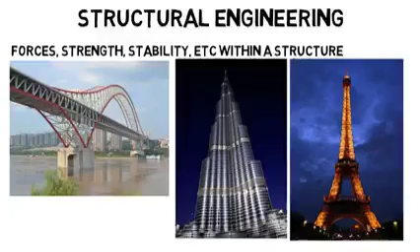So first, structural engineering is about calculating and understanding the forces, strength, stability, and so on within a structure. It could be a bridge, a skyscraper, a landmark, or even a spacecraft or aircraft. Remember, these structures are very heavy and need to support their own weight so that they don't collapse.

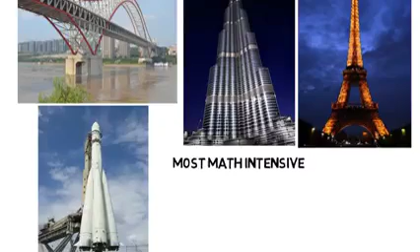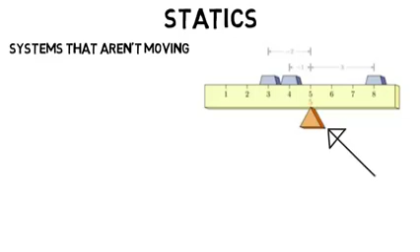Now this subfield is the most math intensive and has lots of physics. All civil engineers will take a class called statics, which is all about the forces and systems that are not moving. In basic physics, you may have done a statics problem, like where does this support have to be for the system to be totally balanced and therefore not moving. You summed all the forces which equaled 0 and all the torques which equaled 0. And that's the basics of statics.

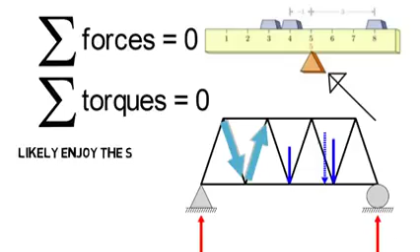So if you're looking at the forces within a bridge or truss, well, the same principles apply, but now there's just more to it. The weight is straight down as shown in blue, all the beams exert forces on one another, but the sum of them is equal to 0, and the torque sum to 0 as well because the bridge is not moving. And it's of course even more complicated than this, but if you enjoy that kind of basic physics you see above, then you'll likely enjoy the statics and physics you see in structural engineering.

So that's just a very simplified explanation, but now let's dive into some of the classes they would take. One class that would be important for structural students is a reinforced concrete class. In concrete structures, they reinforce it by putting steel beams in the concrete. We can't see those beams, but here, before construction is done, you can see them sticking out, or you can see a lot of them on these unfinished columns.

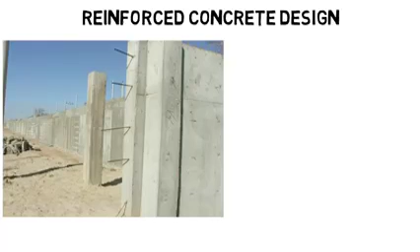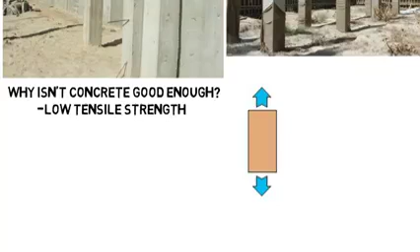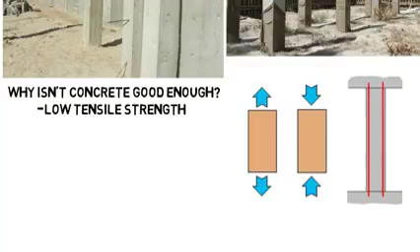So why do they do this? Why isn't concrete good enough? Well, concrete alone, once hardened, has low tensile strength, as in it does not handle being pulled very well. However, it's okay with being compressed. But to counteract that low tensile strength, they add steel beams and pour wet concrete, which hardens around them, and then those steel beams have high tensile strength to counteract those types of forces on the structure.

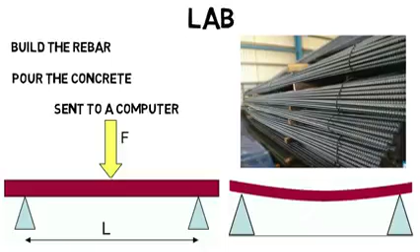So in a lab for this class, you might build the rebar, or the steel reinforcing rods, pour the wet concrete onto them, then once it dries, use a machine that holds the beam on both sides, then apply forces in the middle and keep increasing the force until the beam breaks or cracks and starts falling apart. That force being applied is sent to a computer that tells us the loading on the beam so we can collect the data and get the properties that we need.

You could take structural dynamics as an elective class. Dynamics is about moving systems, unlike statics. So this is one of the few classes where motion is included. So whether it's wind or an earthquake that shakes a building, you need to know how that motion will impact the structure itself and all the forces within it.

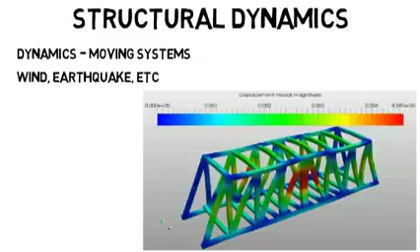I've shown this animation before, but mostly for mechanical engineers as it's a vibrating system that they could analyze, but civil engineers could get into this as well. They have to make sure their designs can stand up against any type of movement the structure may be subject to. You could take an elective class on seismic analysis, which is specifically about calculating the responses of a structure to an earthquake, or one on bridge engineering, which would be a class on highway bridges, materials used, distribution of loads, and how forces are spread throughout the structure, and so on.

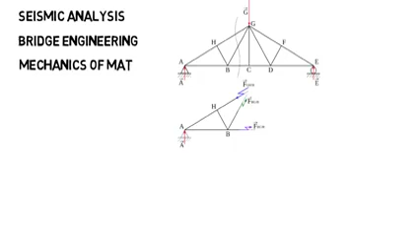Mechanics of materials, like how twisting and bending a beam or column causes it to become internally stressed. Timber structure design, which is about analyzing properties and forces within wooden structures, and much more. See how even if you choose structural engineering, you could still take many different classes from the other structure students? It's a very broad major, but hopefully you really get the idea by now.

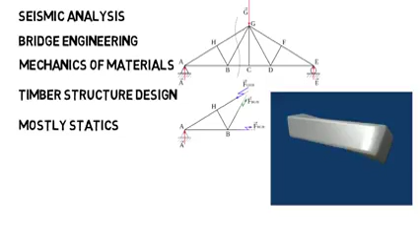Lots of physics in this discipline, but mostly statics or forces and structures without movement. In the real world, these engineers often work on the computer and use software for their designs, where that software does that advanced math to determine the forces throughout the structure, like you see here with an office block and its components.

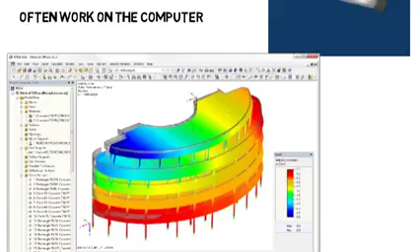You may still have to do hand calculations, but most of the rigorous analysis you learned in school will be left to the software. Now let's move on to geotechnical engineering, and you'll already see how different these disciplines are.

Geotechnical engineers are concerned with the behavior of earth materials like rock and soil, but the main focus is soil. This may seem odd, but you'll see how important this is.

The structural engineer can do everything right to make sure the building will stand up, but if the geotechnical engineer messes up and you put a structure on soil that can't withstand it or is uneven, the building could fall, sink into the ground, or even lean to one side, probably the most famous being the Leaning Tower of Pisa, which was a result of soil issues.

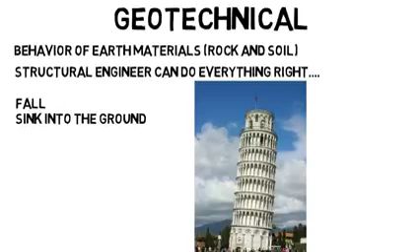Then they also have to consider the foundation of the structures being designed, like whether they should have a shallow foundation or a deep foundation. You may not realize it, but our houses and all the buildings you see have foundations that go underneath the earth to keep the structure as stable as possible by transferring the weight from the structure to the earth.

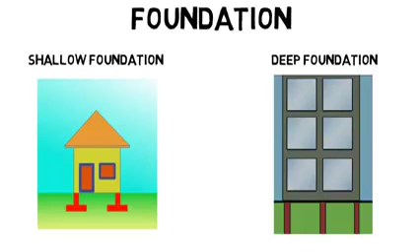But geotechnical engineers rely heavily on testing. So a lab you might see in college is to go out as a class and collect soil samples around your university and bring them to lab.

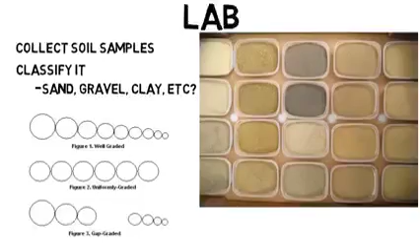You would have to classify it, like whether it's sand, gravel, clay, etc. There are many soil types, and you may have to look at the grain size or how it reacts to water. You determine its water content by analyzing the sample, which will be comprised of solid soil, water, and air of different masses and volumes.

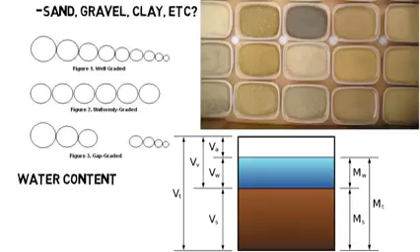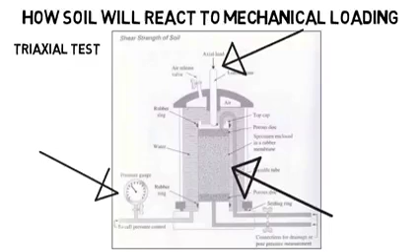But most importantly, you'll measure how the soil will react to mechanical loading or to different forces acting on it. So you might perform a triaxial test, for example. Too complicated to explain for this video, but essentially you put the soil in an enclosed area and apply a force or load to the top which pushes down on the soil. Then pressure sensors measure the pressure at different points to see how the soil is being affected.

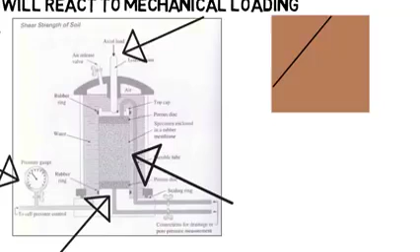If you imagine a square sample of soil and you add a force to the top, the soil can fail along some weak plane. Basically, the weight overpowers the friction holding the soil particles together, and the soil starts to slide, which is known as shear failure. Its ability to stand up to this is known as shear strength, which is one thing the triaxial test tests for.

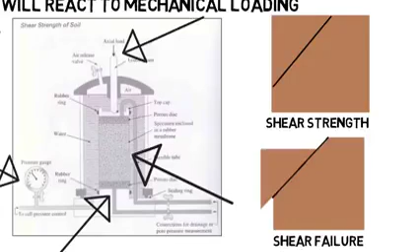And this leads us to what a career in geotechnical engineering could be like. You might be the person who goes out to the field where a structure is going to be built and collects soil samples all around the area for testing. Or you could do testing at the field.

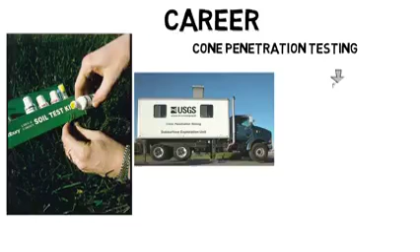One of the most used tests right now in this field is cone penetration testing, where a large truck goes out to the field with all this equipment on it, and a cone is pushed into the soil, and the pressure is monitored by a computer on the truck as it moves through the soil into the earth. Based on the pressure, you can analyze the soil's mechanical properties.

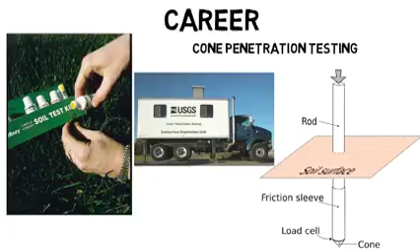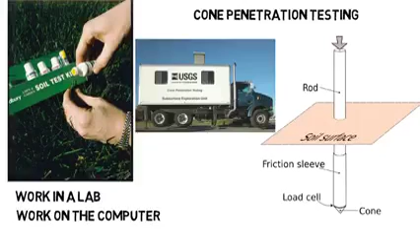Or maybe you could work in a lab where you would do the testing on the soil after it's been collected, like I showed with the triaxial test. Or maybe you could work on the computer and input the different types of soil from the various locations at the site, so you can digitally lay out the area that the structure will rest on. So you could be in the field, in the lab, or on the computer.

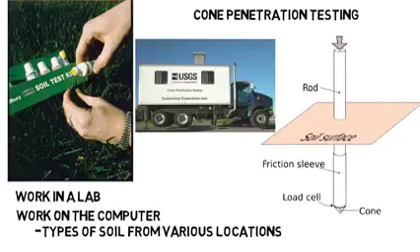Your elective classes could include geotechnical earthquake engineering, which is about learning the dynamic behavior of soil as opposed to the structure itself. Then slope stability analysis and how to safely design structures on slopes, such as an embankment dam. There's also analysis of deep foundations, where the structure goes deep into the earth for stronger support, like for skyscrapers. And of course, there are many more classes.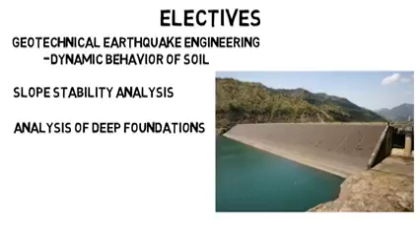Now let's move on to water resources engineering. This is about the design of systems to manage human water resources. They can work on a water treatment facility, designing dams, pipelines, channels, canals, and so on.

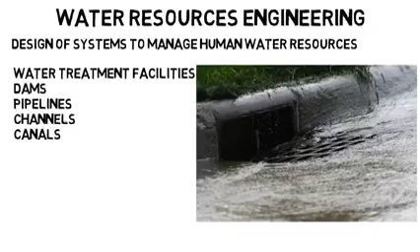Maybe you have to design a storm drain system in the event of a large storm. Where is all the water going to go, and how will you get it to the ocean efficiently? Or you could design a canal, which is an artificial waterway to transport water for irrigation, or used for ships and boats. Or you could design a culvert that will allow water to flow under a road or trail or some other obstruction.

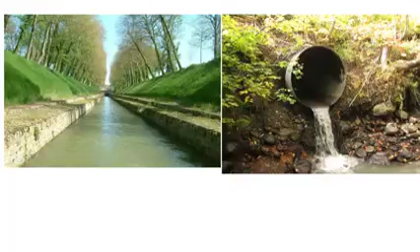Elective classes you could take include coastal hydraulics, where you learn about ocean wave propagation, submerged pipelines, seawalls to protect human habitation, and so on. Or open channel hydraulics, which is about fluid flow in an open channel as opposed to a closed channel or pipeline.

And last is transportation engineering. This is about safe and efficient movement of goods and people. These are the engineers who design streets, roads, highways, railroads, public transportation systems, and even airports.

Maybe this engineer has to look at the kind of demand from a new development, whether it's a new stadium in your city, all the way to a new grocery store in a new location. This is going to cause new types of traffic throughout the area. The engineers would try to optimize how the new development impacts existing traffic.

They would look at data from other similar places to see what kind of traffic they get, then try to make improvements where possible. It could be simple like adding a bus stop in the nearby area, all the way to expanding the roadway to allow for more traffic.

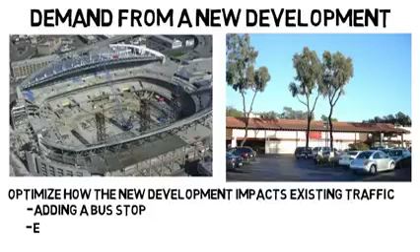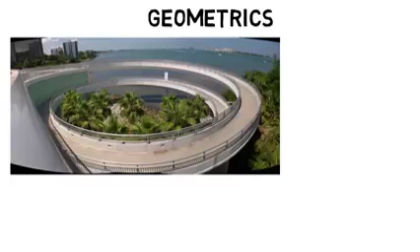They could work on the geometrics of the roadway, such as what radius of curvature an off-ramp has to be for a car going 55 miles per hour so the tires won't slip. Or if they're going up an incline, the driver needs to see far enough ahead to stop if there's a sudden obstacle. Or what do the cross sections of a freeway need to be for the lanes and shoulders to accommodate the amount of traffic expected?

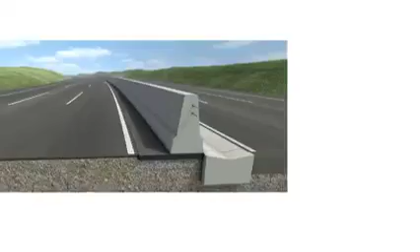Let's say a highway interchange is being designed. A structural engineer would make it stable and design the structure itself, but the transportation engineer would determine how many lanes are needed for the interchange based on traffic, or how the merging should happen to maximize safety. They make sure the layout is designed to maximize traffic flow and safety rather than the physics of the structure itself.

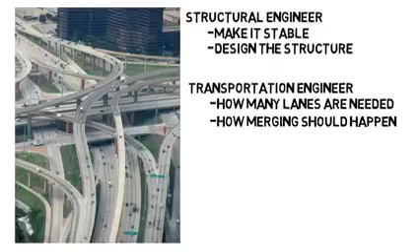Often these engineers evaluate potential improvements to cities in terms of transportation rather than create a totally new design. You probably haven't had many new highways put into your city in the last few years, but there's probably been plenty of construction, whether it be adding an express lane or a bike lane, etc.

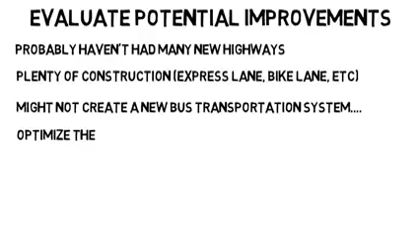So they might not create a new bus transportation system, but they may optimize the existing one. Maybe they take data from how many people get on the bus, how long the bus takes to complete its route, how long people are waiting for the bus, and so on, to optimize the route, the amount of stops, and more.

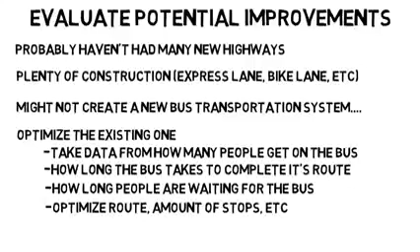Your career will also likely involve a good amount of computer work. You might have to create a layout of the new lane, off-ramp, bridge, or whatever you're designing on AutoCAD, which is a very important software for civil engineers.

Or you could use software to analyze and simulate traffic. You could actually lay out the roadway of a city and use collected data of traffic during different times of the day and simulate new additions. Like you could add in a stoplight somewhere and see what the new traffic would be like, or make a minor change, like making a certain stoplight stay green for just a few seconds longer, and see how it affects traffic on those streets.

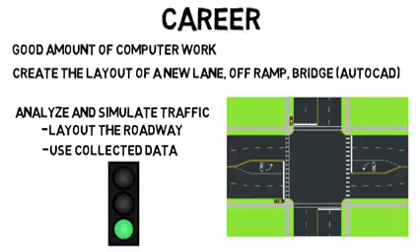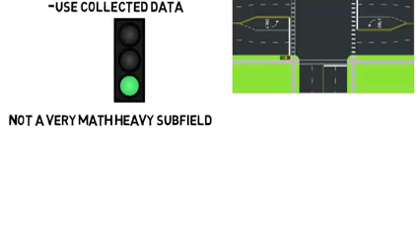Just note, this is not a very math-heavy field. In fact, it's probably the least math-intensive of the 4 subdisciplines I've talked about. It's more about taking data and analyzing it. Even when I talked about the radius of curvature and how fast someone should be going, you won't use the coefficient of friction and do circular motion physics or anything like that. You use even simpler equations to get what you need.

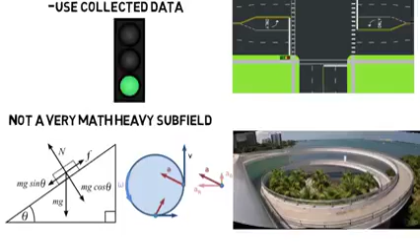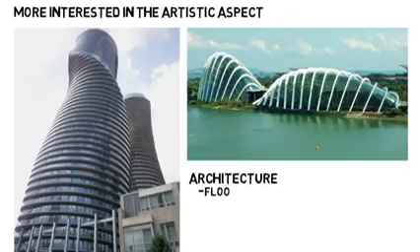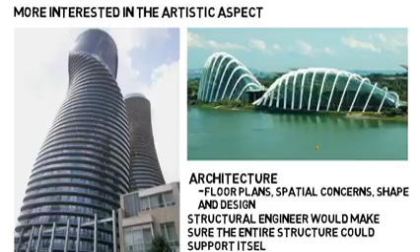Now that's all the main subdisciplines of this major, but there are some final thoughts I want to include. If you're more interested in the artistic aspect of building and structure designs, then architecture will be better for you. Architects deal more with the floor plans, spatial concerns, and the shape and design of buildings. They have to understand structures and physics, but not quite as much as a structural engineer. They would hand off their design to the structural engineer, who would really make sure the entire structure could support itself, and deal with more of the technical work.

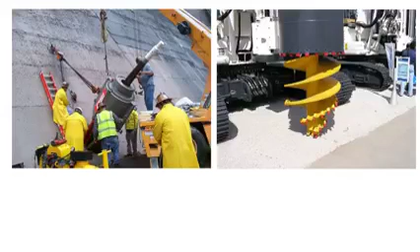Then, if you want to be the one who puts on the hard hat and does all the hands-on work with the machines and physically builds the structures, then construction will be better for you. But there's also construction management, which you can still get a job in as a civil engineer. Construction companies will hire civil engineers because of their technical background. Construction is the hands-on part, but construction management is more about guiding the construction, putting together schedules, budgeting, and figuring out how all the pieces will come together.

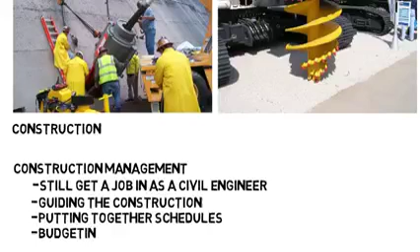According to the Bureau of Labor Statistics, the average salary and the number of jobs in the United States for these 3 majors are all pretty good. Of course, these are just averages as of now, but hopefully this gives you a good idea of what you can expect.